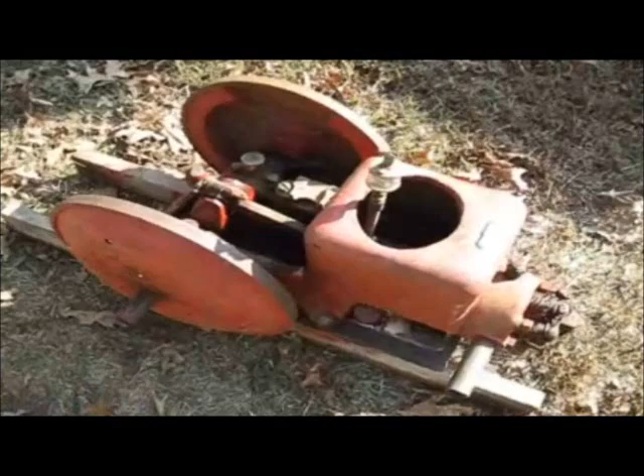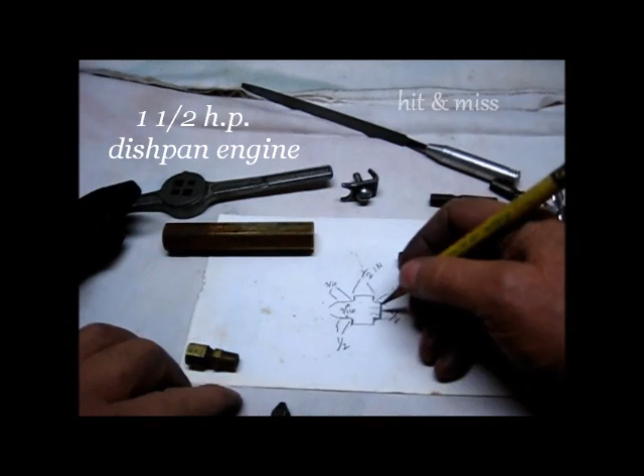And then I'll just turn it down to a pleasing taper. You know, if you want to, you can figure degrees on that there, but I'm not going to do it. I'm just going to turn that down to where it looks about like this, and whatever it is, is what it'll be. And I think we'll have success with it.

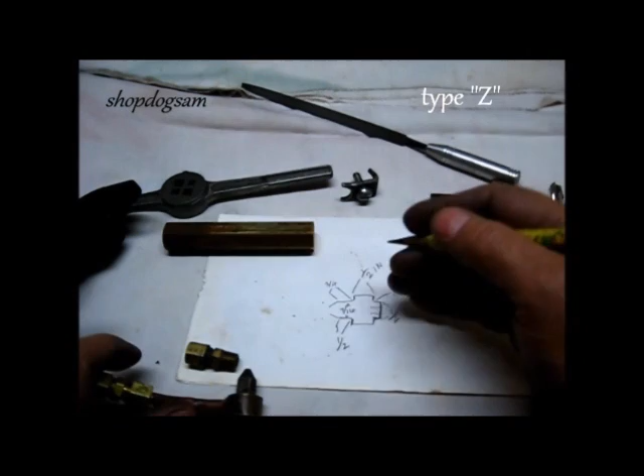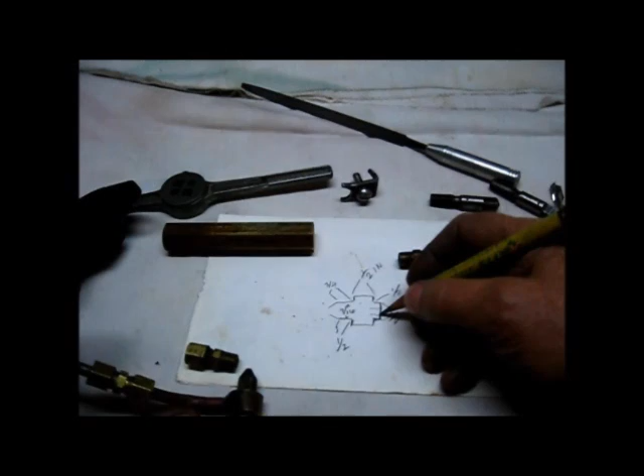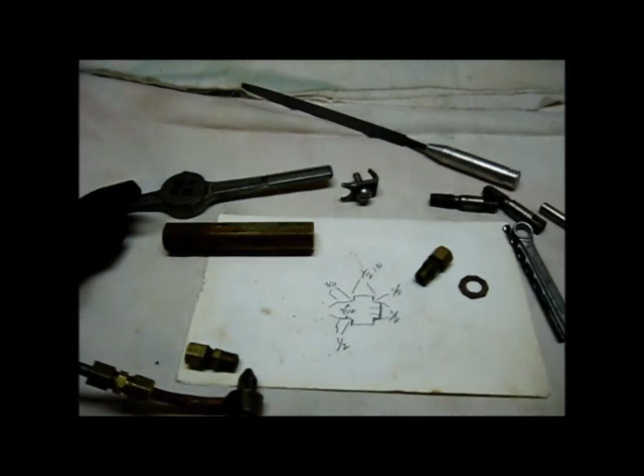Okay, now looking at this thing inside, it's cut half in two. Just visualize this. We are going to drill and tap this right here with a Q bit. Y'all see that Q on there? Okay, that's the size for this fitting right here. You drill that up in yonder, and then you take one of these, it's a pipe tap, taper tap, and this is a long one, but it's not the really long one. There's 3 of them, and this is the medium sized one, medium taper.

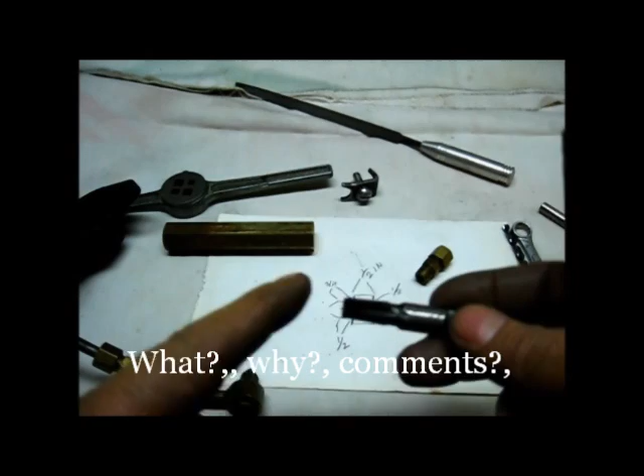And that's what I'm going to use, and I'm going to start it right in there, get my hole about what I want. And then this one right here used to be one like that, and I took a grinder and ground part of the end of it off so I could make a bottom. I made a bottoming tap out of this. You can do it with this one right here. Just grind about 1/8 inch of it or more off, and then you got a bottoming tap. Now it does make the little thread there on the end brittle, so you're at your own risk to make that modification, because if some of that breaks off, sometimes it's a pain to get it out.

Keeping all this in mind, now right down here, we're going to drill up this way also with that Q bit, and we're going to thread that. Oh, this is not complicated. This is really easy, basic. This is your basic stuff right here. Okay, and now we're going to have a fitting sticking out here. I'm just going to put this in here for the time being. And we're gonna have a fitting down here. This is what you're gonna have.

Okay, inside this right here, right up here, and don't. I know you was a thinking he's gonna forget it. He's not gonna get it in this video, and it'll be continued, and I'll never know it. Yes, I'm gonna get it in here.

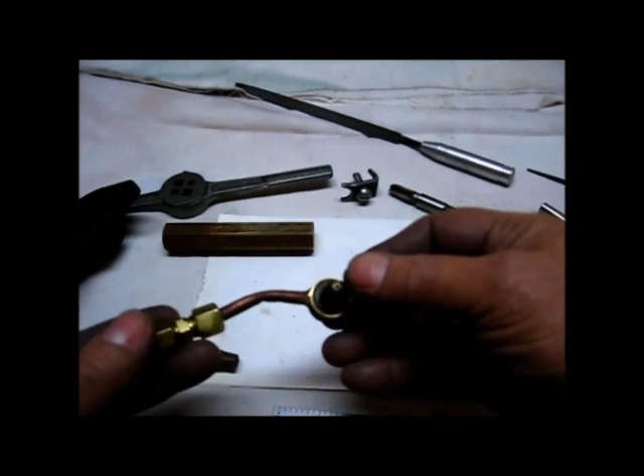Y'all see right there in the end of that? That's that little jet size right there. And it's better to have that undersized than it is oversized. That's a no-no to be enlarging them jets on anything like that, especially for low speed. You want that to atomize. Okay, so looking at that hole, I can gauge what size drill bit to get. When we get to it, I'm not going to pencil that in. I'm just going to leave that with you.

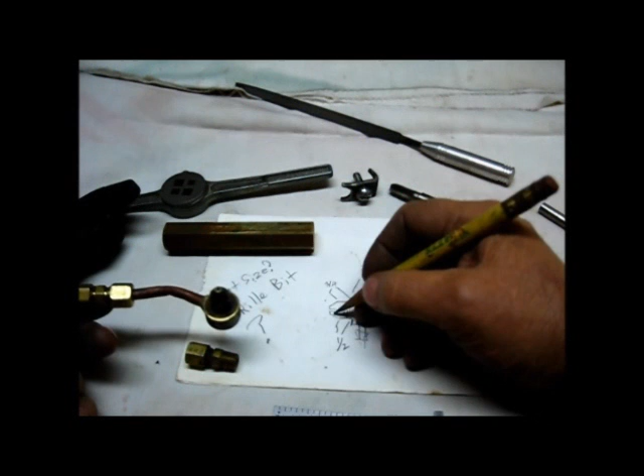And to see that, look here, that has to be like that right there. And there has to be a small amount of solid material right in the end right here. And so this right here needs to be a taper down there. Okay, and that's going to come right on up here like that right there. And when you put your needle valve in there, well, I'll measure it when we get around to that. We're going to do it together.

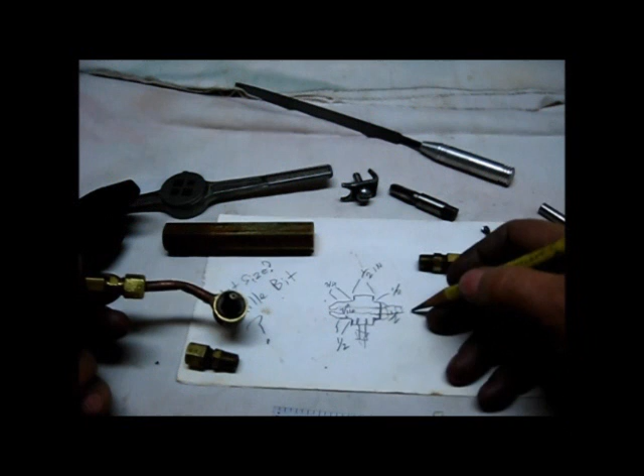I'll measure down in there and see how long, and we're going to make that needle valve, and we're going to put one of them little curly things on the end of it right there. We're going to do that. I don't know if I'll get it in on this episode or not, but we're going to get that done. We may even silver solder it. I'm not positive on that. I may just peen it over, and we'll see about that.

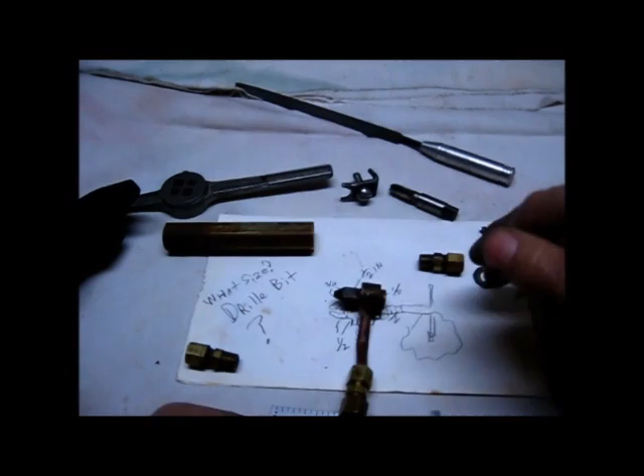That's all I'm saying. Okay, and this right here will come on out here, and if you was looking at this side view, you would only see the skinny part right here. And that's where you turn the thing right there and make this go in and out. So we will have to turn a taper on the end of this needle valve, right down here, and it will probably be sharper.

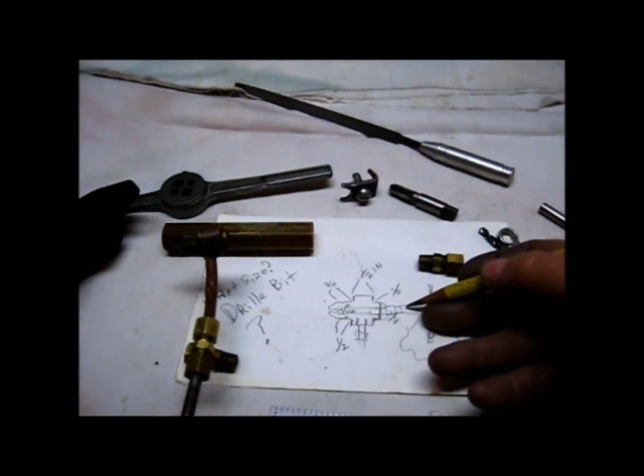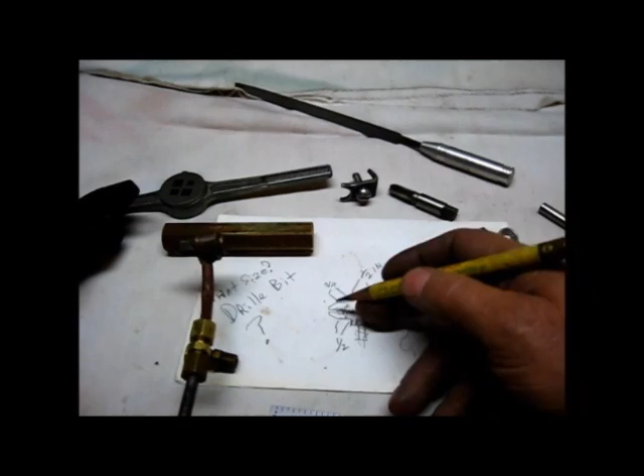And this taper down here, I have done it before several times, and I've had no problems with it. When I drill, say this number 7, when I'm going to use a 6, when I drill that through there, I'm going to go all the way down and stop right here, and that will form the taper on that drill bit, whatever it is, just whichever one I get out of the box, then that will be what the taper is. So you don't have to remember nothing there, just that will be sufficient.

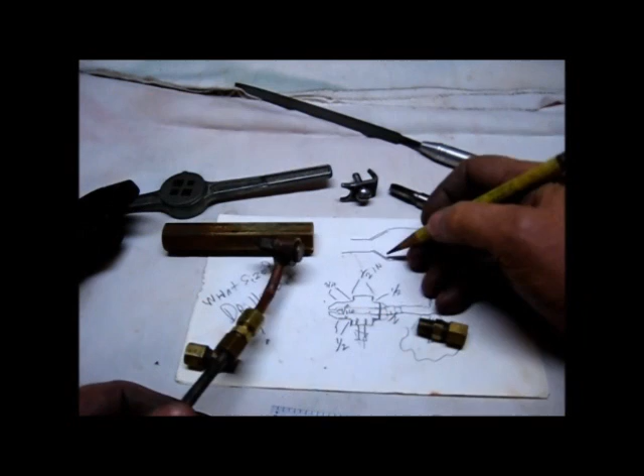Because you really do not, okay, I'm going to give you a shop tip. The taper, let's just picture this right here. Okay, you've got a taper right here, and you need to plug that up. You do not turn exact degrees here. Like this is a 45. Okay, you do not turn the tip on this valve at a 45. It will always be slightly different, even on an automotive valve. You know, one is 45 degrees and one's 46. And that's so that it will have a slight difference.

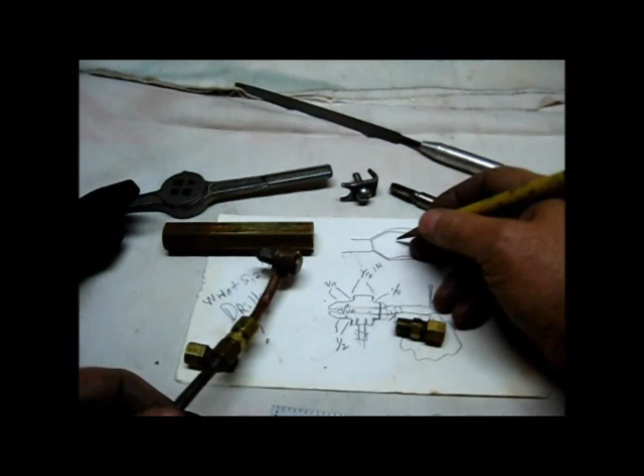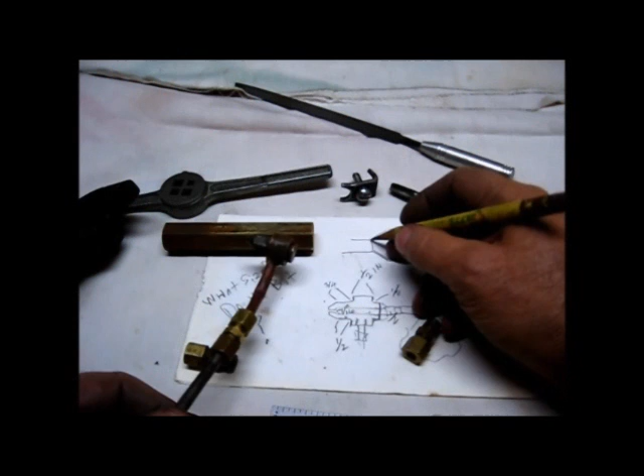If you had a taper like this right here, just let me explain it to you like this. If you cut a taper like this right here, and you've got the least little speck of something, let's say carbon, so this won't give at all. There's that little piece right there. Okay, you've got no sealing, because it's 100% distance, whether it be 1/1000 or a 1/4 of an inch. It's the same amount. So you do not want to turn this needle valve the same, even to the point of lapping, like a check ball in a check valve.

Well, actually, if it's a steel ball, then you do not want to put rubbing compound on the end of another steel ball and cut the seat identical. It's much better to have a taper seat. Even right here, a seat like this right here, you could throw a steel ball in there and that would be a perfect seat for that. Or you could even have a longer taper like this right here. So you could do that right there.

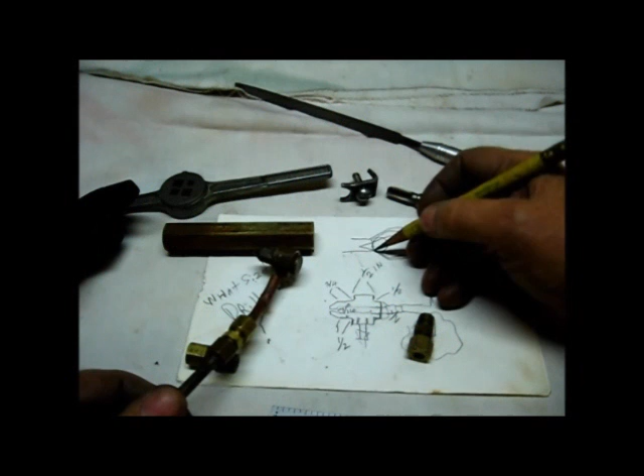Okay, you're only making contact at these 2 points right here, but it's all the way around and it's a perfect seal. And that way, if this right here wears, then you would be tightening this just a little more, and you would maintain the same amount of seat. Over here, this is not good according to steam people. That's just a tip.

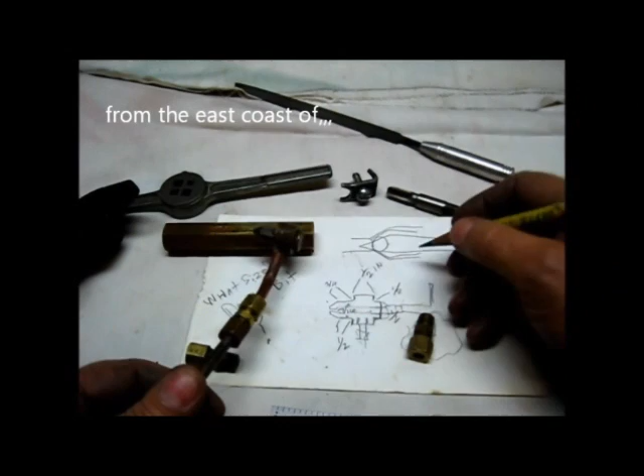Okay, let's move on. I think that's pretty much all of this. We're gonna go over at that Grizzly lathe. I'm from here on the East Coast, Arkansas. Shop Dog Sam. Oh yeah, we're working on that dishpan, that Fairbanks-Morse. That's the engine we're working on. That's a real old model engine.